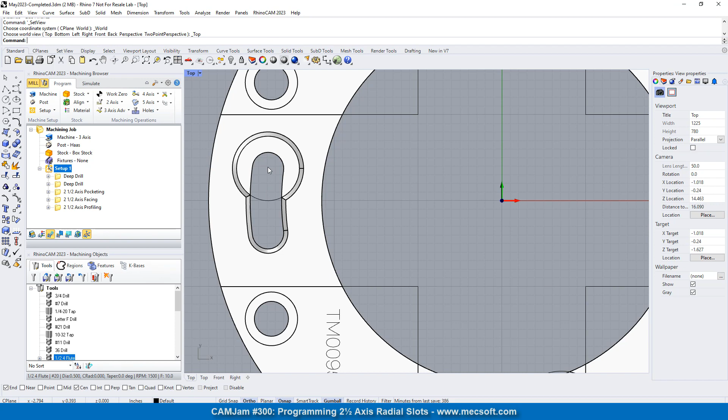So what we're going to do is we're going to add some additional curves to help machine these slots. Now, as I mentioned, there's different ways to do this as well. What we're going to do is you're going to draw the center line of the slot from the center of this curve to the center of this curve on that angle.

Okay. Now you could just pick the perimeters of this slot and just pocket it out. You could do it that way as well, but we're going to show you how to do it because the tool we're going to use is the same diameter as the slot. Okay, if you want to slot with a tool and the slot's the same diameter as the tool, you need to do this method. If you try to do it with pocketing, you'll probably get an error because of tolerances.

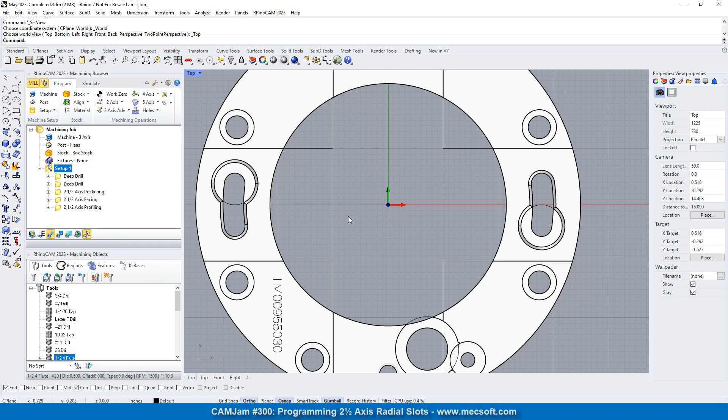It won't let you fit a tool that is the exact same size of the pocket that you're trying to cut. So in slotting, that restriction is overcome because this operation is specifically designed for slotting. So let's go ahead and we'll go to an isometric view, and let's do this from the bottom, be a lot easier.

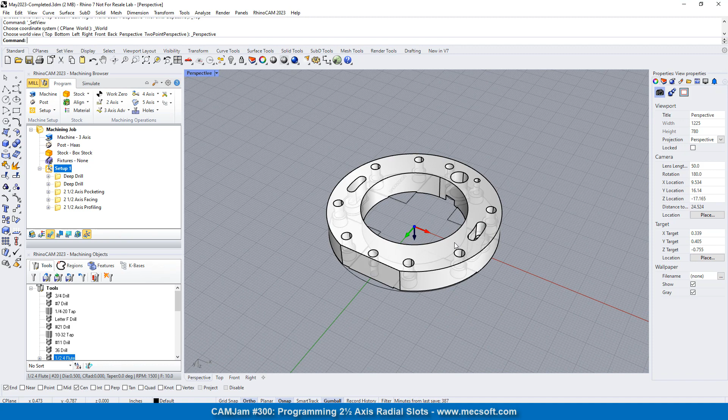So the first thing I want to do is I want to draw a circle at the center and at the center. So we have a circle through both slots. Now we want to trim up that circle so that we only have the center line of the slot itself. So let's draw some lines.

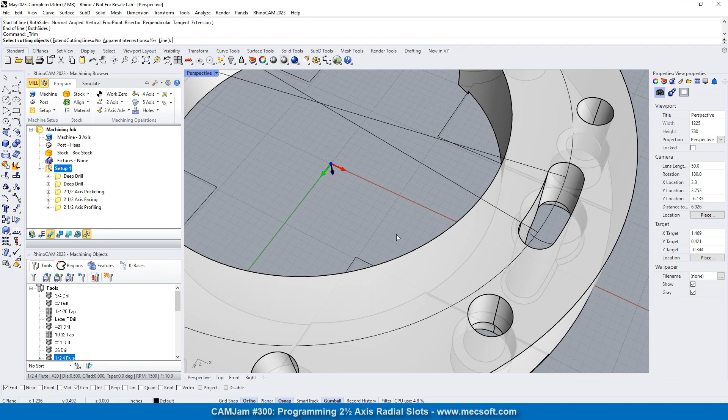We'll go from this center to that center, this center to that center, this center to that center, this center to there. Okay, so now we've got those and we're going to trim those up. So we're just going to go select all of these and then we're going to trim. Okay, we don't need those anymore.

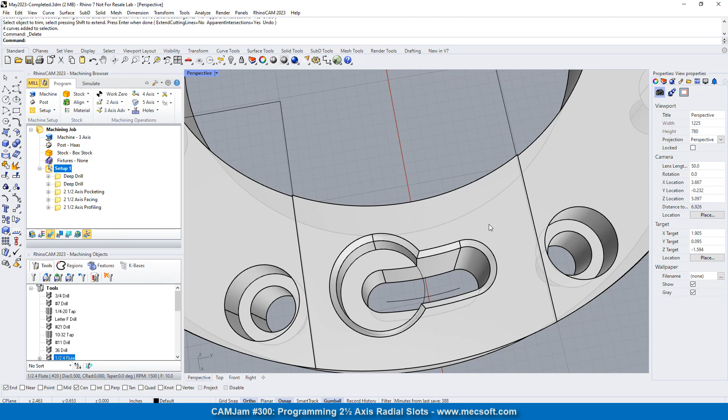So now you'll see that all we have is the center line spine, we'll call it a spine curve of this slot. So now we can go ahead and do the slotting operation, 2½-axis slotting, and we'll get rid of those. We don't want those. We're going to select these two spine curves. Okay, so we got two curves selected.

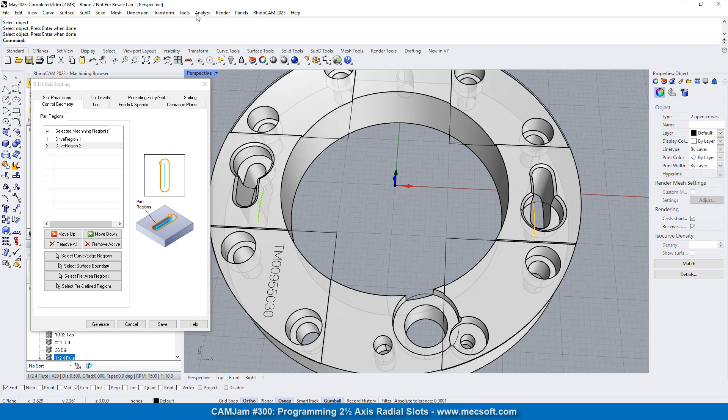Okay, and let's go ahead and make sure we understand the diameter of those slots. Let's go down here and do it from in here. Okay, so that's 375, so 3/8 of an inch wide. Okay, so we're going to go ahead and use, I think we have a 3/8 inch flat end mill. And for the cut parameters, a tolerance of 1 thou, 0 stock.

Now remember, the tool is the same width of the slot, so if you attempt to give it any stock, then it won't calculate it because you're going exactly that width. Well, let me back up and rephrase that. It probably will calculate it, but it will do a step over. We'll just see. We're not going to do it that way, but I'm just talking out loud here.

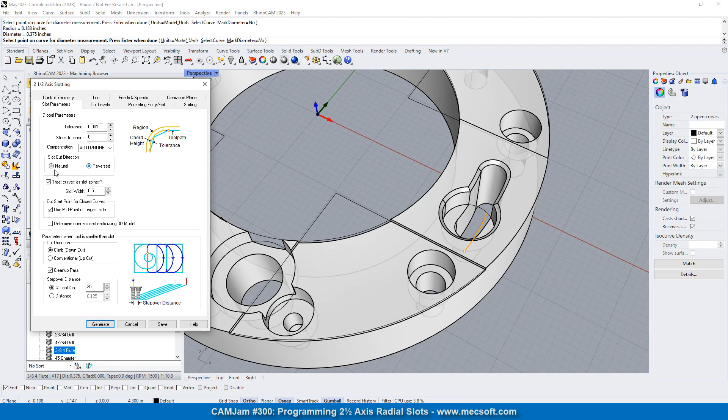So for the slot parameters, 1 thou tolerance, the slot direction, natural and reversed. That's just the direction of the curve. And we'll go ahead and turn that off. This is not really going to apply since we just have one path that we're going back and forth for the slot.

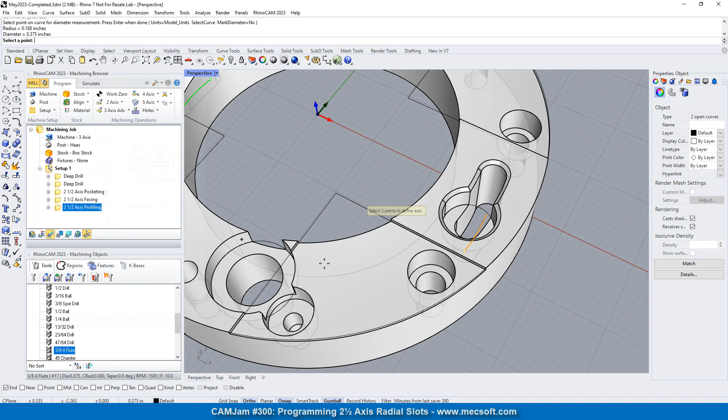So for the cut levels, the location of cut geometry is at the bottom. And for the total cut depth, it is 1 1/16 of an inch, and we'll go down 0.125, eighth of an inch. Okay. For the pocketing entry, we'll just do a path, and we don't need any sorting, and we can apply the entry at each cut level. Let's do that. Okay.

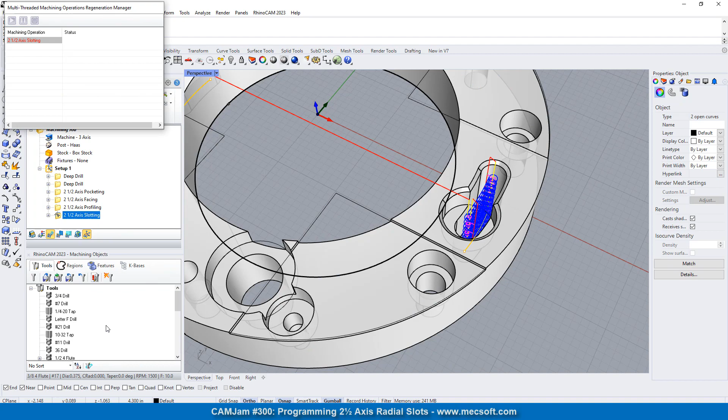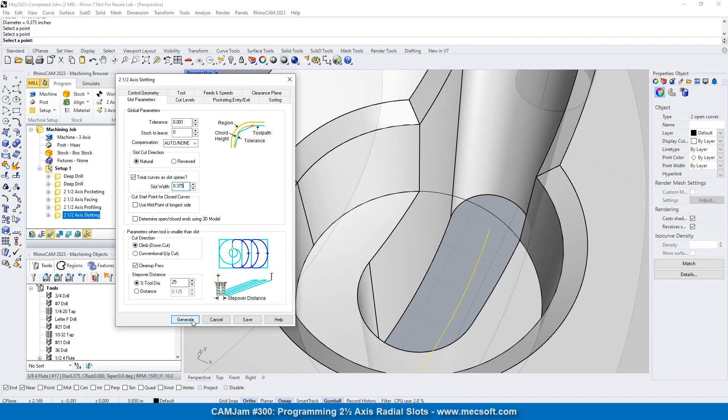So that is not what we wanted, so let's see what's going on there. Let's go to the slot parameters. Okay, that's the problem. Slot width, it was set to 1/2 of an inch. We want it set to 375, 3/8 of an inch. Let's pick generate. Okay, that's a lot better.

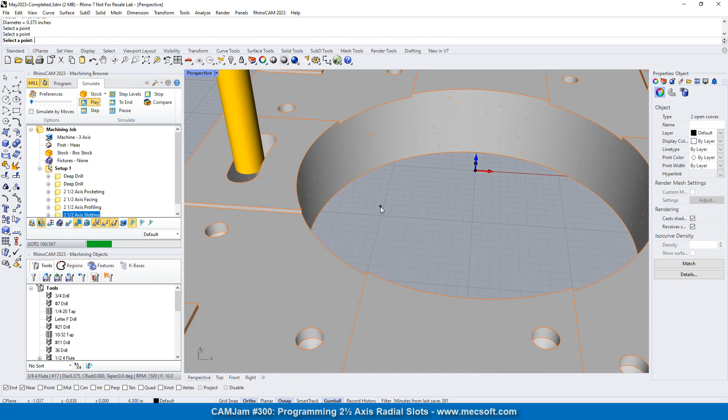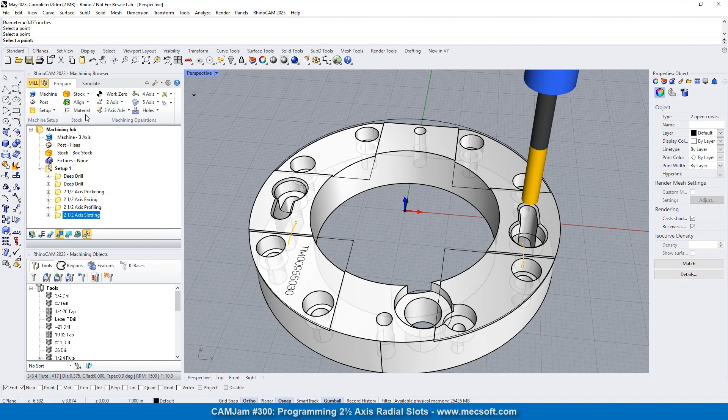So let's look at that. So we've got 1/8 inch cut levels. We got ramping going on at each cut level. Let's go ahead and simulate that. Okay, there we go. We got those 2 slots done. Okay, let's go over here and decide what we want to do next.